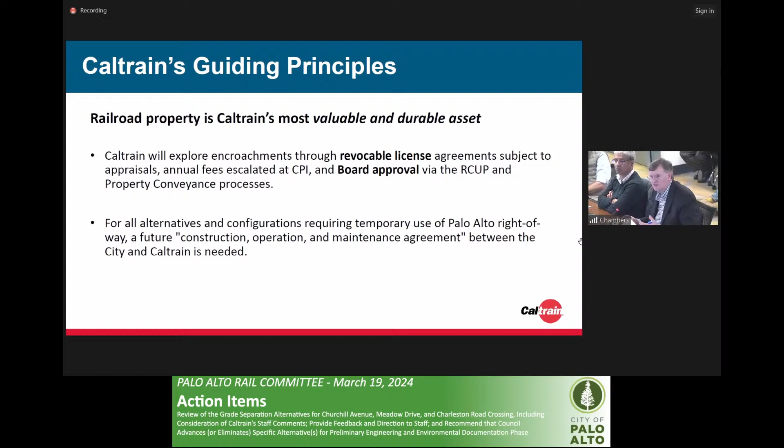And then we also took a look at a smaller item, but we wanted to make sure that we shared it. Today, as we go up and down our alignment to inspect our track, we do that on our own property. Some of these improvements would build a viaduct or a wall at the property line, and we would need to be on Alma Street to do that. And so if we were going to be on Alma Street to do the inspection, we'd need a permit. And so we wanted to at least have the conversation about those elements. Next, please.

And as this gets grade separated, we want to find ways to still accommodate that use of the right-of-way. How do we preserve the utility of that right-of-way in a way that accommodates the community's vision today, but still allows us to use it in the future if we needed it? And so, looking at those solutions in keeping with the board's policy on right-of-way is to make sure you consider the entire width of that right-of-way and how you use it. So next, please.

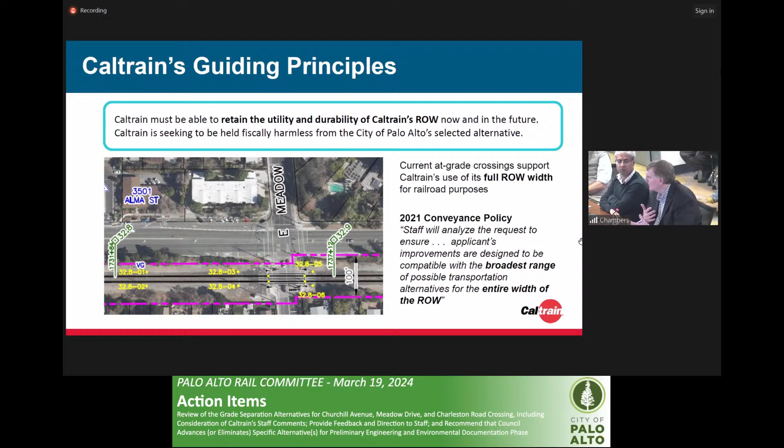So here's a typical cross-section that was in the plans. And we had talked about whether it was 15'6" or 16'6" for those standards. And, you know, we changed that standard in the last round of our criteria. We had 15'6", and then in 2020, we changed it to 16'6". But we walked through that with our operations folks, our safety folks, our engineering folks and with our exec, and said we could live with the 15'6" as it's designed.

Because as you said, Council Member Lauing, if you change that profile of the road, you're going to increase the impact to the neighborhood. We don't want to do that. Can you make 15'6" work? Yes, we can. We would need a sacrificial beam to kind of protect the structure. And so that's been done in other places. Metrolink does that. They allow that with a sacrificial beam and an agreement. If the beam gets hit, the city would pay to get that repaired.

So what's the purple line here? Which line? The purple line. Oh, the purple line, that's the road coming down and back up. Okay. And so that's just a cross section that shows the road going down and back up underneath the grade crossing. I didn't know if it was a measurement or actually the road, so thanks. So you see the little dash box, that's providing that width clearance for the full width of the right of way from a standard that's been there for a long time.

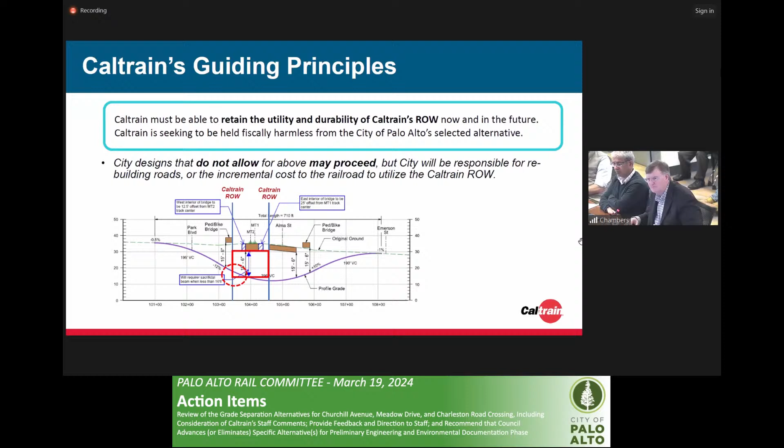So would you even need the option to, quote, raise the road? Wouldn't it be much more... Well, likely no, that would be for the train. The notion was, it wouldn't be up to us to make the decision.

If you wanted to rebuild the road, you could. Got it. If you wanted to raise the railroad, you could. If you wanted to raise our railroad today, you could. But just knowing that we need that clearance to full width, and how do we accommodate that? And it's really a PE level of analysis, but we wanted to be clear that we could make 15'6" work. But if it wasn't the full width, we'd need to have some level of agreement.

Does that make sense? Yep, and you probably have a long notice period from the time at which you need it. Yeah. It takes a long time to build anything, particularly a railroad. I do have one additional question there, if I may, and I know there's a balance between getting through the presentation and getting questions answered maybe at the end. So I'm going to ask this. If it's simple, we can answer it now. Otherwise, keep going.

It's feeling obvious to me, which means I don't fully understand it. Like, why wouldn't we just build the road right in the first place? Something about the slope required. If we do that extra 2 feet at the ultimate depth, it's going to create a much longer slope. How much longer is that slope? Roughly. Edgar, I think you did a little bit of math on that. Yeah, it could be, again, it depends. There's variables that could be adjusted, but we expect it to be somewhere between 80 and 150 feet additional. That means additional homes. Yeah. Okay. And so we were trying hard to not do that.

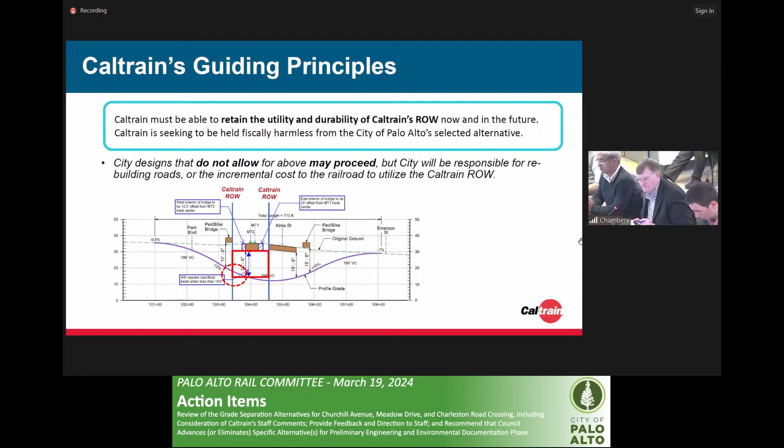I just want to loop back then to the Rengstorff. From what you said, it sounds like it did not include it. And are you going to require that as a change to their design? So I need to look into it a little bit more. My understanding was that was the direction the team was given, but where it occurred in that life cycle, I'm not sure. Okay. Next, please. Next, please.

So we wanted to not bury the lead, so we wanted to provide a quick executive summary at the high level. So if we take a look at the Churchill, there was already a selection of an LPA with 2 backups. And so 2 of those are viable and 1 of them less so. On the locally preferred alternative, the Kellogg undercrossing, there's some minor adjustments to Alma Street. They had about a 5-foot encroachment. We can accommodate about a 3-foot encroachment.

There is the bikeway on the west side that encroached significantly into the Caltrain right of way. That's the narrow side of the tracks, and we could not accommodate that. So the pathway on the west side needs to stay within the 25 feet that's available today, or move farther to the west, or potentially relocate to another location. And I think staff is wondering about that question. Philip? Yeah, so if you're referring to Kellogg versus Seale, we are planning to bring a report on that at the next rail committee meeting next month.

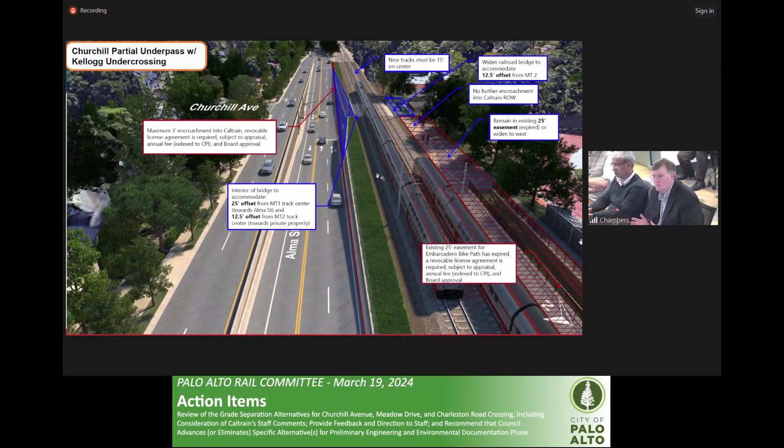And then the last note there is that a maximum encroachment of 3 feet appears to be viable. So taking a look at where the tracks are and where the OCS poles are along Alma Street, it looks like we could accommodate a 3-foot encroachment and still make that work. It did show a 5-foot encroachment, but we think we can make 3-foot work. So next, please.

So this is taking a look at the undercrossing at Churchill. Starting at the top, working my way around counterclockwise, there's a note about making sure we stay within the existing 25-foot easement for the Embarcadero path. Then it talks about the 15'6" vertical clearance. That's what we used to have. We want to go to 16'6", but we realize here that would create more impact to the community. We could accommodate the 15'6" with a sacrificial beam and an agreement.

The other thing that was shown at this location was pushing into the Caltrain right of way to accommodate vehicle turning movements. On this side of the right of way, we could only accommodate 3 feet, and it was showing an extensive encroachment that we couldn't accommodate. So we looked for how else we can solve that. We lost the...

Sorry, she's pulling up the PowerPoint rather than that, because you have some animations in the next slides. Thank you. Oh, okay.

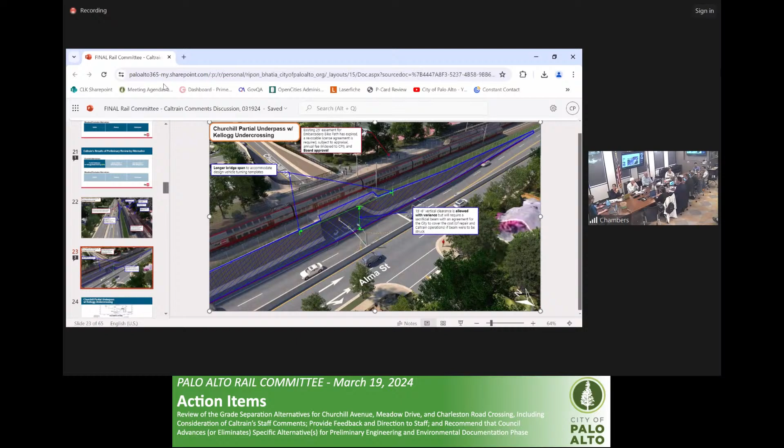So we were looking for a way to help solve that. And so we looked at, can we make the opening longer? Can we make the bridge longer and accommodate those turning movements? And we worked with AECOM, Palo Alto's design consultant, that said if you made the bridge longer, that would accommodate those turning movements, and then we wouldn't encroach into your right of way that you can't accommodate. So that was kind of the creative engineering solution.

How can we make sure we don't impact property owners by going more than 15'6", and how can we make sure we don't encroach more into Caltrain's right of way where it can't accommodate it and still allow the turning movements that are necessary for emergency vehicles and others on the road network? So this was a creative solution for that.

I have a question on a couple places. It notes that the bike path encroachment or this prospective encroachment for the eastbound right turn from Churchill is subject to appraisal and annual fee. Does the city currently pay for the bike path encroachment and for the encroachment that we currently have of southbound Alma onto Churchill?

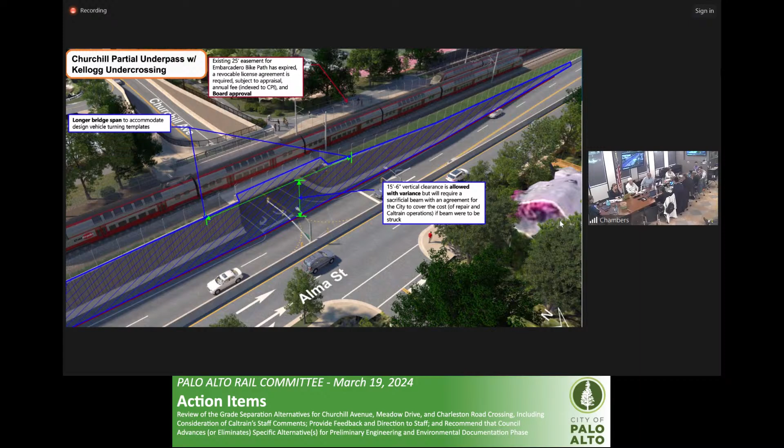And so I believe the encroachment for the Embarcadero, that agreement has expired. So Embarcadero? The Embarcadero bikeway. Oh, the bikeway you're talking about, that has expired. No, but my question is, before it expired, were we paying for that encroachment? Go ahead. Yeah, go ahead. So no, historically, we have not.

Right. Oh, thank you all. Thank you all. I think when you push it, it would go on, but it doesn't always do that.

So no, historically, we have not paid for it. However, as we've been engaged in conversations with Caltrain, we have received the request to pay. And we have not paid for the Alma right turn encroachment either or elsewhere. So as we at Caltrain have said, we now have a commitment to a corridor-wide strategy and a partnership with the cities. The partnership means that we'll start charging cities for the encroachments when we didn't do so when we didn't have a partnership. I don't know if we want the partnership.

So what staff is trying to communicate is the board established a policy, and the policy said that for uses of the right of way that are semi-permanent, the board directed staff to get an appraisal and go to the board to have a fee schedule. But the board has the ability to say that for this particular use, they get to establish whether there's a price or not. What staff is communicating is, here's the board policy that was established and here's what it says, but it's a board level decision.

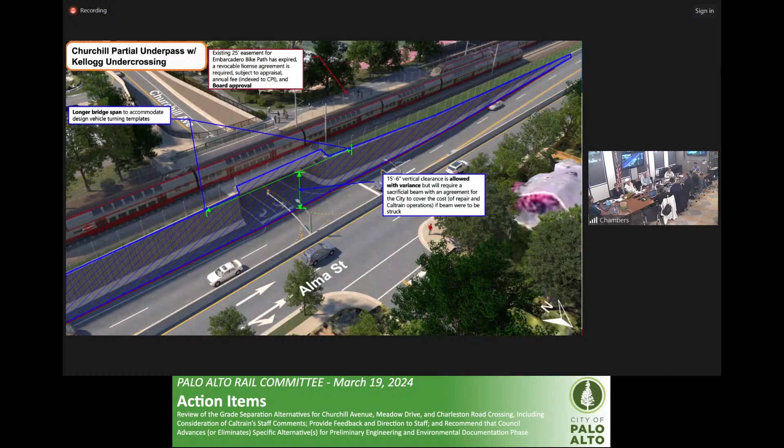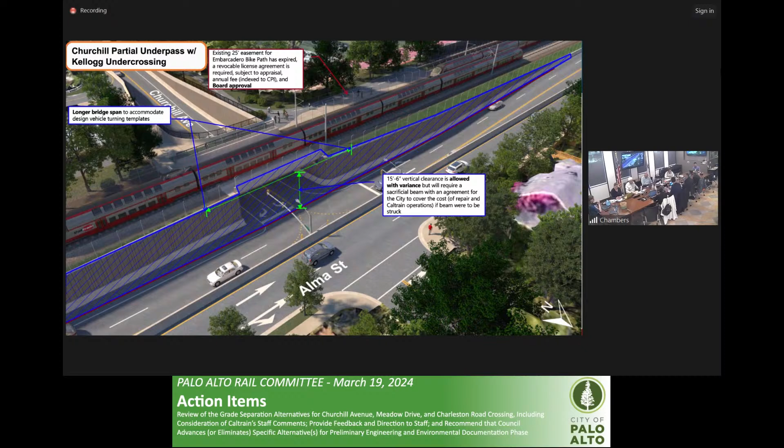But the intent of this slide here was to say that originally there was a solution that didn't meet the needs of the railroad. We wanted to make sure that we could provide that creative engineering solution. Well, we will move the wall over here. We'll make the bridge a little longer. We'll do some sacrificial beams. We won't change this. How can we find that art of the possible that still keeps the intent of the design, but accommodates the needs of both to the minimum extent possible? Next, please.

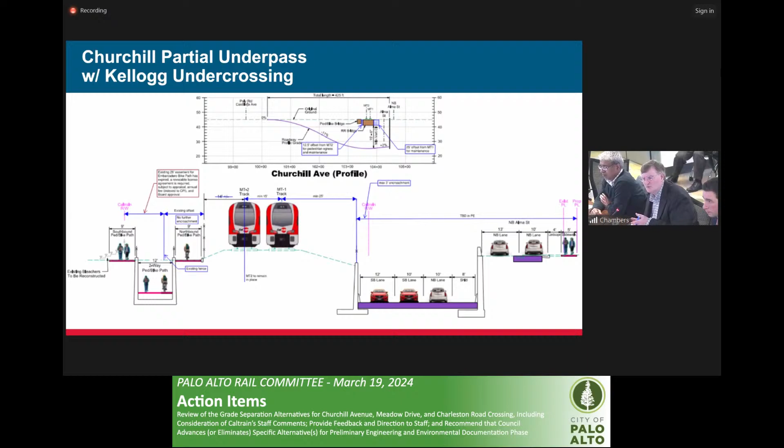So this is just the cross section, shows the same sort of information. The cross section at the top shows the 12.5 feet on the one side, which is the 7.5 foot clearance envelope for the train and a 5 foot for emergency egress. And then the 25 foot on the other side, which is accommodating the OCS poles and the 10 feet.

The section on the bottom shows that 3 foot encroachment into the right of way. Originally it was 5 feet, so we said we can accommodate 3. Looks like that might be able to work with that cross section that's there, still makes that viable. And then on the left side, that blue line is the existing fence line, and those trains are actually a lot closer than was illustrated, and we really can't accommodate any further encroachment there from where the OCS poles and the train are at. That's a pretty tight side of the right of way.

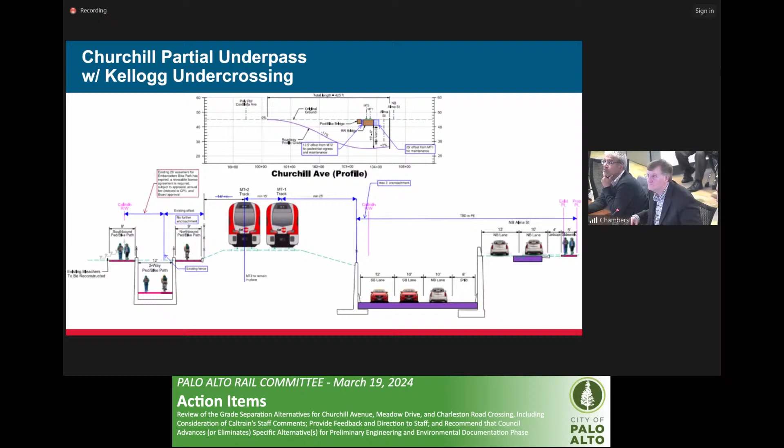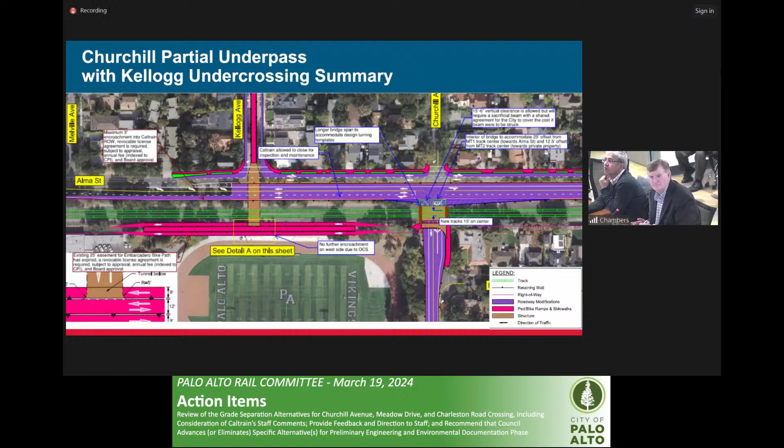Next, please. And this is just a plan view showing the same thing, if that's easier to understand. It has the same notes, just in a plan level view. Next, please. The closure option with mitigation.

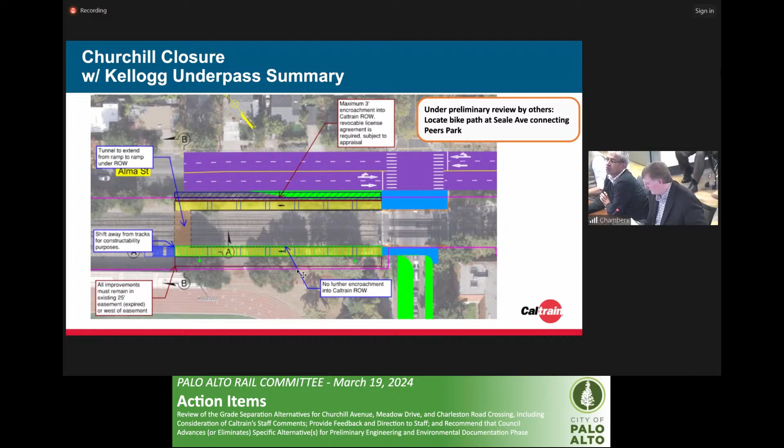Moving to the west side, the bottom part of the plan view, because of the location of the track and the OCS, we could not accommodate any additional encroachment. But we did suggest if you're going to put a ramp at this side, you'd flip its location and make it more to the bottom part of the page to get it away from the OCS poles to make it more constructible. And of course, would have the tunnel be the full width of the right of way, similar to what was done for the Middle Avenue undercrossing in Menlo Park. But this one was a little less viable because of that east side pathway.

The next one was the closure option with mitigations, and Caltrain had no comments on that. It appeared to be viable just as it was shown. Sorry, I'm new. What is the difference between option one and option two? You want to do it? So the Churchill, it's the crossing along Churchill, underneath both Alma and the railroad tracks. So it's perpendicular to the railroad tracks in the middle of Churchill Avenue. So it would close Churchill. It's right in, right out.

And sorry, just to note that closure option 2 with mitigations was the one that was preferred as the backup option among closures. So it's the backup option to the partial underpass. But the closure option 2 with mitigations was the preferred backup option. Yeah, and you're right. It's a closure option with right in, right out on each leg only. Correct.

And moving south to Meadow Charleston, starting with the hybrid. Again, starting with the top and working around clockwise. There's a right-of-way jog at Meadow, and so that's material to where you place the tracks. So the first note there is the tracks be aligned as far west as possible at the very southern portion because of that jog. We'll have more slides on that a little later, but that's kind of where you started. Where do you put the tracks? Let's start there first.

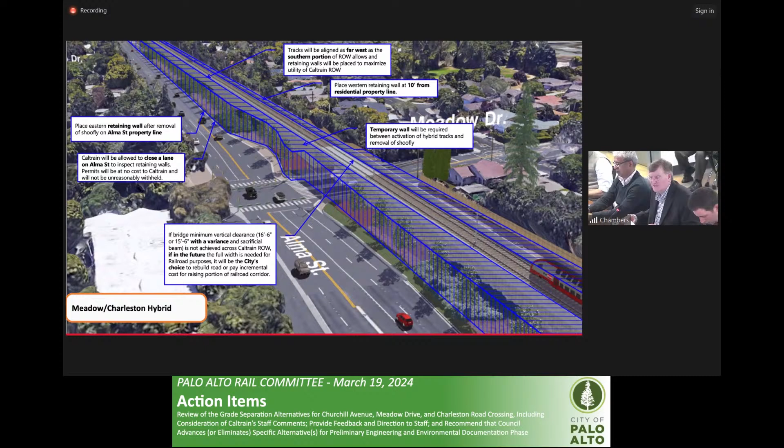The next note has to do with the temporary wall, and we'll explain that a little bit more with the cross section. And then we talked about that 16'6" versus 15'6" before, and so that's just the same note. And then we talked a little bit about the retaining wall on the other side would be at the Alma Street property line, and there might be an opportunity when we need to inspect that, and we'd have to get a permit from the city, and we'd look for that permit at no cost like we do at other jurisdictions. Next, please.

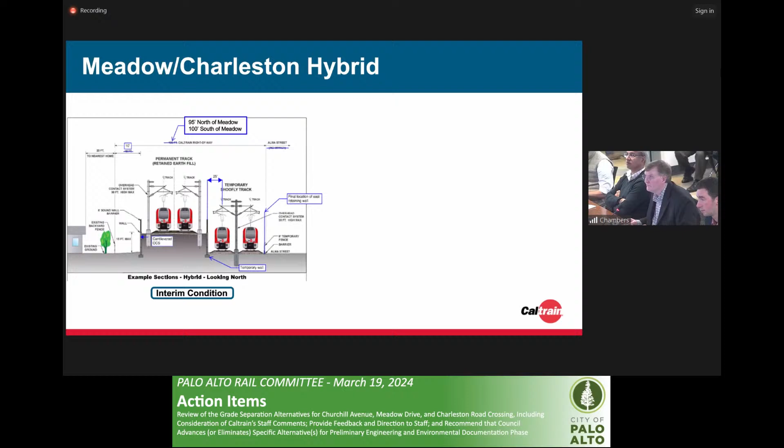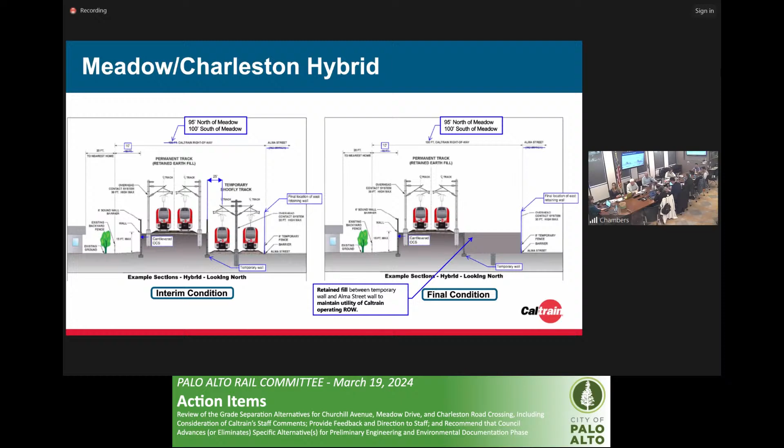So this is a cross section, and it's important to understand that the shoofly that is shown here actually ends up being in Alma Street travel lanes during construction when you do the math. So we wanted to help illustrate that. Next, please. There we go. And then in the final condition, when you've got the west retaining wall 10 feet from the property line, then you've got the permanent track for the hybrid, and then you've got the eastern wall at the Alma Street right of way. Then you fill in between those so we can continue to inspect our tracks and have full utility.

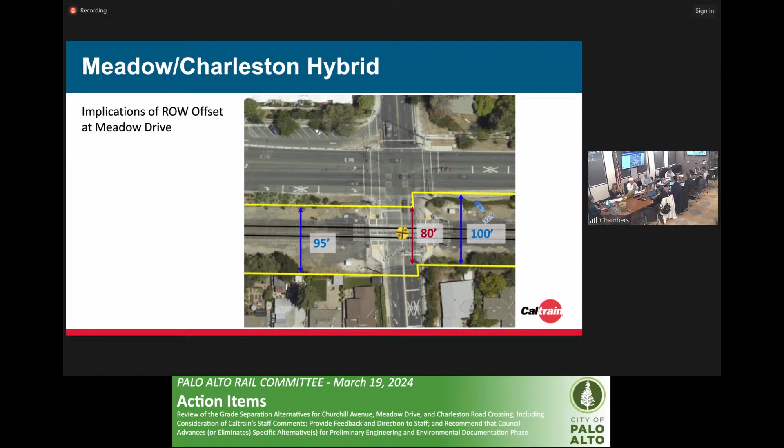Now, you heard me talk about that offset at Meadow, and it has implications. On one side, it's 100 feet wide. On the other side, it's 95 feet wide. So it jogs. On one side, there's a 20-foot jog, and the other side, a 15-foot jog. And so that's material in terms of how you lay out the track and the implications of that. So we have a little bit of a slide deck for that. Next. So this is a plan view looking at existing conditions. You can see main track 1 and main track 2 there today. Next, please.

So you want to build your shoofly along Alma Street. Now this shows a 25-foot clearance between the centers of track. It's important to understand the service disconnects. It's like if you're going to do a remodel in your kitchen, you turn off the circuit breaker, so when you're working on your appliances in your kitchen, you're safe. So the service disconnects for this section of track occur at Menlo Park Station and San Antonio Station. They're 4.1 miles apart. So when you go to flip the circuit breaker to shut this section down, you shut down 4.1 miles. And so you want to make sure when you do that construction, you do it efficiently. So this shows a 25-foot offset that allows the trains to keep running, because it shuts down those busy stations that we talked about earlier.

And know that between the last southbound train past San Antonio and the first northbound train that comes into San Antonio, when you do the math of where we are today, during the weekdays, it gives you about 3 hours and 39 minutes. But it takes a half hour to shut down the system and a half hour to turn it back on. So you only have about a 2 hour and 39-minute window to do work. Now on the weekends, you've got about 5.5 hours. And so if you're closer to that electrified line, you can't work all the time.

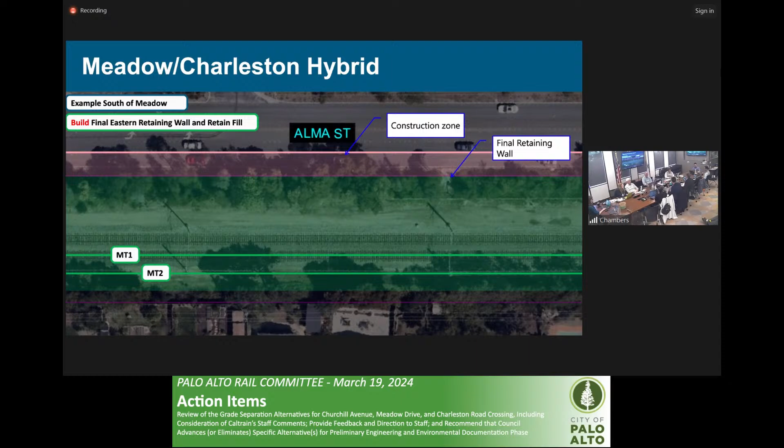Next, please. Now you're preparing to do the last phase, which is to fill in between the retaining wall at the property line and the other structure. Next. And then you fill that in, and then the last slide. And then you've got one more. And there's the final condition. So that kind of walks through it, but yes.

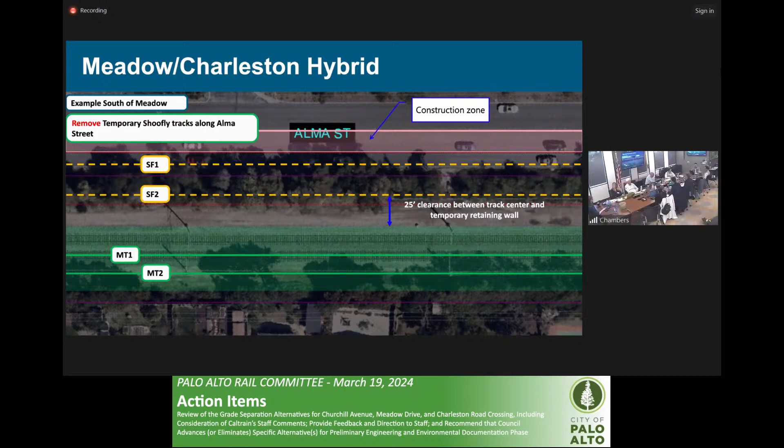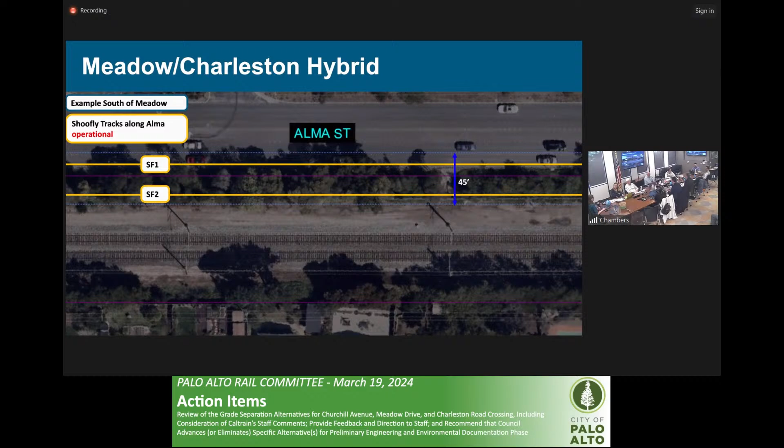I just wanted to make sure everyone understood that main track 1 and 2 moved closer. Yes. And I don't know if you can go back to where that happened so that they can understand that, because I think that's very important for the public to get. Go back one more. Keep going. One more. Keep going. So if you see, there's MT1 and 2, and then if you cycle through, you'll see that they've moved. You see where the existing tracks are in the aerial and where the new tracks are overlaid to that.

Have you said why that's necessary? Edgar, can you explain why that's necessary? Yes, it deals with the jog in the right of way that Rob had shown in an earlier slide. As the jog occurs, having the tracks as far west as possible allows for two things. One, the constructability on the south side of Meadow. And second, on the north side of Meadow is the beginning of the 4-track segment as part of the adopted service vision moderate growth. And so it allows for the future implementation of 4 tracks.

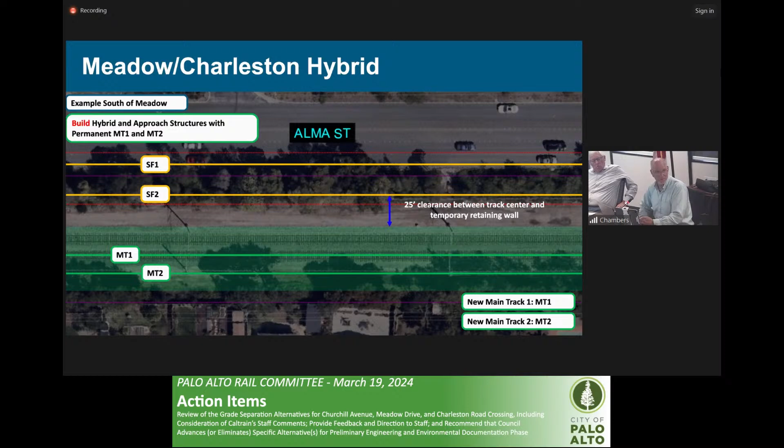And at its full height, the height of the berm is what? Do we recall? I believe in the concepts from the city, it was 15 feet max. So I just want to make sure everybody realizes when we have talked about the hybrid option going back several years, it was often described as, well, the tracks go up a little and the underpass goes down a little. And for those of us who, I had a company 200 yards from San Carlos tracks, the hybrid doesn't feel like a hybrid. It feels like a fully elevated berm. And now that berm is going to be a 15-foot earthen wall, just a few feet from the back fences of all those homes. So I just want to make sure everybody understands the implications of this change.

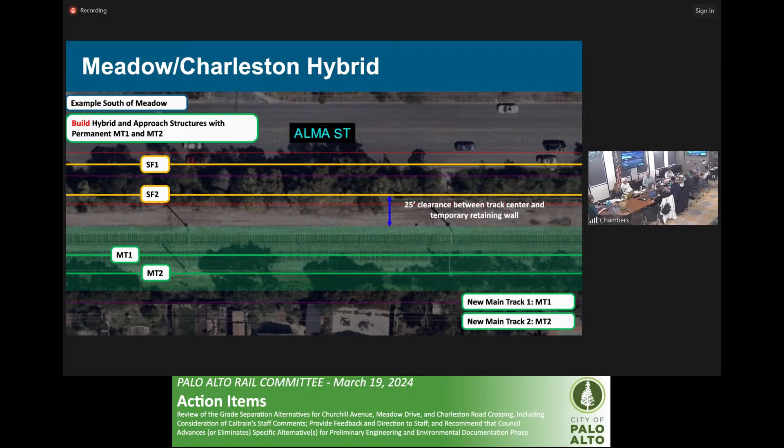Note in this picture, to the west side of the tracks, looks like we have a picture from 70 years ago when we used to have fields there, not homes. So I would just suggest that we get something that gives people a more realistic sense of what it will be. Appreciate that. And I'll also note that with this rendering, you don't get any sense of the elevation of the tracks. No, this was just trying to illustrate. I get it, but people are going to look at it and perceive certain things.

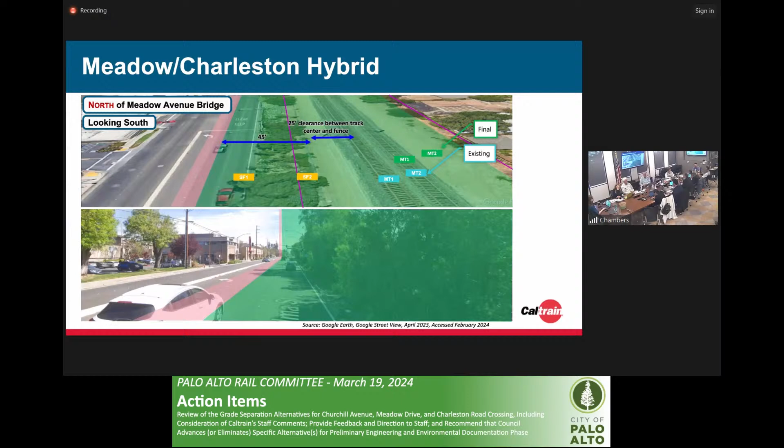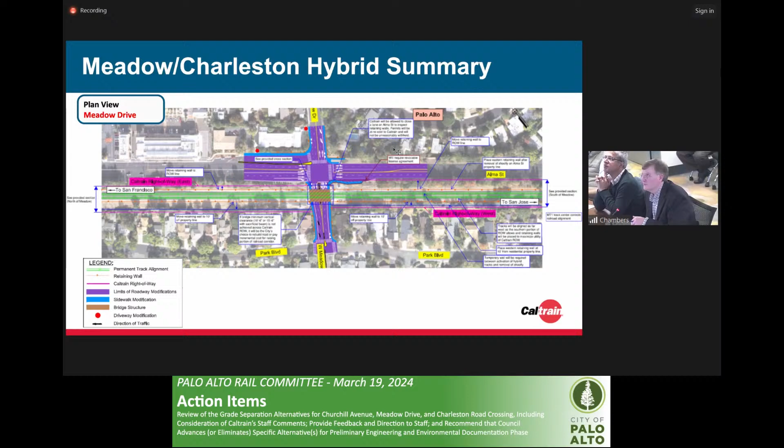And the wires are 22 feet above the track. Yeah. Next, please. So this is just a plan view that has many of the same comments that we've already gone through, but for those that think better in a plan view, we provided those. It has the same sort of things about where the walls are at, those sorts of things, the track alignment, bridge clearances. So next, please. And with Charleston Road, it has the same sort of comments we've gone over before, but just in a plan view.

Next, please. Moving on to the viaduct. Now, with the viaduct, it's important to note that the intent, at least as I understand it, was the viaduct endeavored to utilize the existing Caltrain tracks as a shoofly to save time and money. You don't need to build a shoofly, use the existing tracks. You get right on to building the viaduct. Could be built faster, less impact during construction. But as you've heard me say, the details matter. And so we did a little bit of a deeper dive, which revealed that the viaduct may have a permanent encroachment into Alma Street based on the sequencing plan.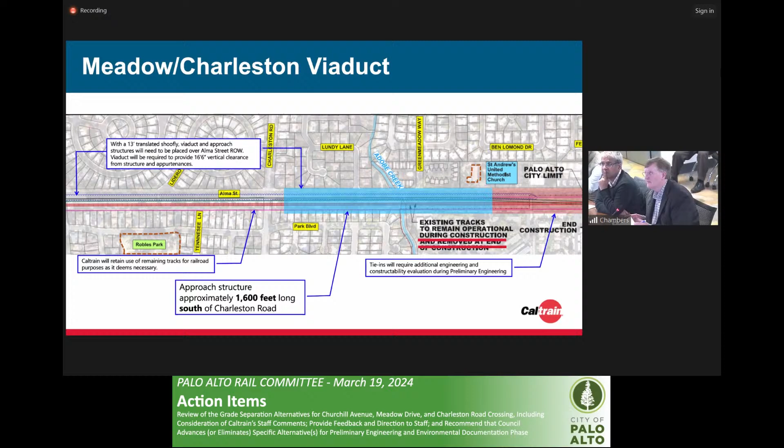But in PE, if this is advanced, we could take a look at other creative ways to build the shoe fly that might not have a permanent impact in Alma. So I just wanted to lay that out there as here's what we saw, here's the implications, but that's not the end of the conversation. That's the start of creative thinking. Next, please. So this is the same as you saw before. This is the existing conditions that we see today. And you see main track 1, main track 2. Next, please.

So there's about 49.5 feet from MT1 to the property line at Alma. Next, please. So again, that 25-foot offset that we talked about, remember those 2 hours and 39 minutes of actual work window if you're not about 25 feet away, or 5.5 hours on a weekend. So let's get away from it so we can work full time. Next, please. So the viaduct is about 52 feet wide from out to out. That gives you the room for track centers, from track to pole, from pole to track is about 26 feet. Then you've got 7.5 feet on either side for the train clearance, and then the 5 foot for the emergency egress. You add all those up, it's about 51 feet, and then a half a foot for the structure to get to the 52. So that's the width of the structure.

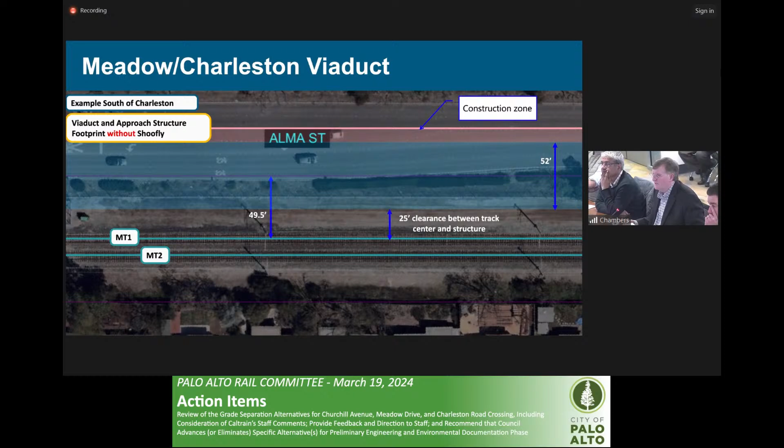So you can see, next please. You can see that really gets pretty into Alma Street, and that's that approach structure that is 1,600 feet long and 2,000 feet long. Those structures are in there forever. So we went, that's probably not what the city intended. So let's look for a creative solution. So the first solution we looked at was, next please. What if we said, okay, here's what's there today. What if we added one track as a shoe fly? So next please. Said, okay, let's build a shoe fly over towards the property owner side temporarily. Next, please. Then decommission MT1. And now you've got that whole thing shifted about 13 feet to the west.

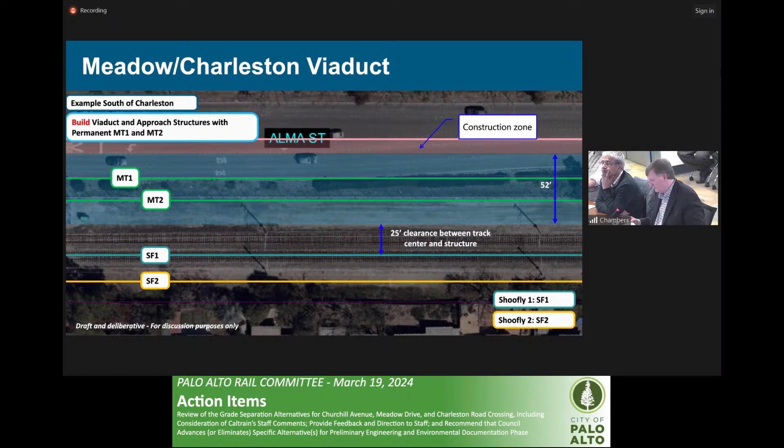And so now you're building the viaduct, but you're no longer as impactful into the street. So next, please. And so that's the final condition. So you've heard me talk about impact to Alma Street. So what does that mean?

So without a shoe fly, you're about, remember the right-of-way shifts in Meadow Street. So if you look to the south of Meadow, we've got a 100-foot right-of-way. You're about 27.5 feet into the Alma Street right-of-way. Now that location has about an 8-foot shoulder, so you're about 19.5 feet into the travel lanes.

Now north, the right-of-way shifts, but you still have that same impact because the road doesn't shift. The right-of-way line shifts, but Alma Street keeps on going. So you still have about 19.5 feet of travel lanes. Now, if you do the shoe fly, let's get a little better. Let's get in a shoe fly. With that, the impact is about 6.5 feet into that travel lane.

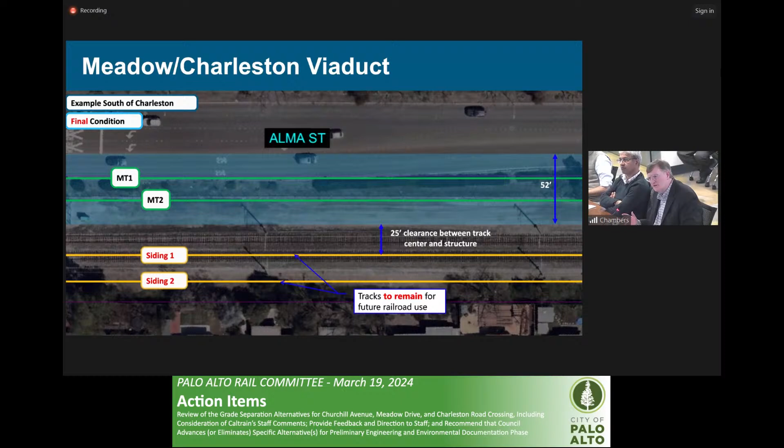Now, during preliminary engineering and final design, could you find ways to make that not 6.5 feet, but make it not impact Alma Street travel lanes? But it would still be in Alma Street right of way. Unless you flipped it on its head and said, let's do the shoe fly out in Alma, like we're doing the hybrid, and build a viaduct over the property. But that's one we weren't charged to look at.

But when we did the analysis here, I don't think folks understood that until we did the homework. So we thought that might be material to decision making to understand. We tried to be creative with what we saw, but it's still a pretty good impact. But it's not the end of the story. It's the part of creative problem solving. But we wanted to highlight that.

So you're saying that the flip that you just said, hey, wait a minute, there may be a problem with what was proposed, but we could flip it, create a shoe fly on Alma. It's the same type of shoe fly as exists with the hybrid. Yes. Okay. And we haven't analyzed that. That's just me thinking out loud, and it would require a lot of help from a lot of engineers and others. But taking a look at what we saw today, we thought it was important to communicate what we found. And it would be material to decision making.

If the decision was to move forward with the viaduct, it was predicated on not building a shoe fly. But the results of that are impactful. So to minimize and avoid those impacts, you might have to build a shoe fly. But those are choices. Questions? Does that make sense?

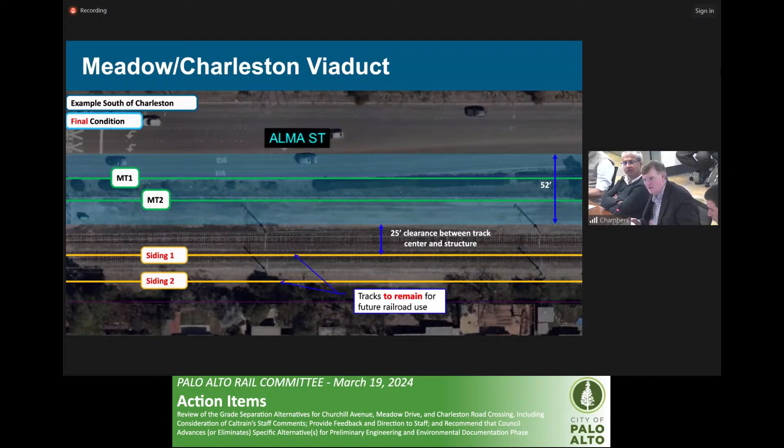So this is just that same illustration where all the buildings look flat. But it does show shoe fly 1 is an existing track, and shoe fly 2 we'd build, and the 25-foot clearance and the new MT1 and MT2. You can see that approach structure, even with shifting, is still in Alma Street travel lanes a good amount. And that's even with trying to be creative with adding a shoe fly.

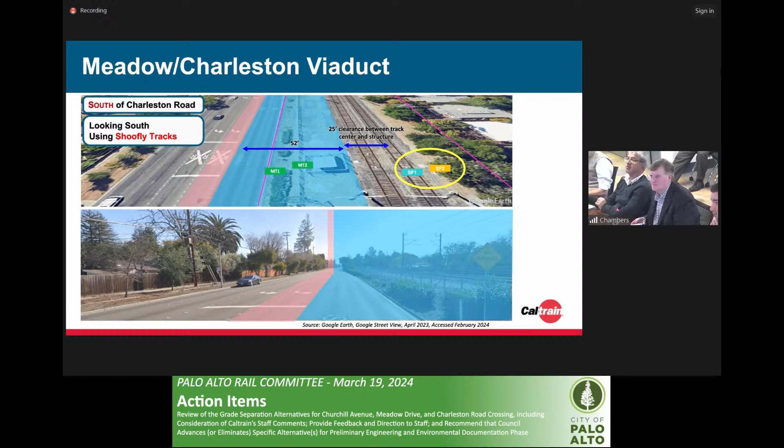Next, please. And these are the dimensions you heard me talk about, the 47.5 feet, the 1,600 feet and the 2,000 feet. Realizing that the structure type that's there for the viaduct would need refinement during preliminary engineering and final design. Do you put the OCS poles in the middle? Do you put them to one side? There's a lot of engineering yet to go with that. Next, please.

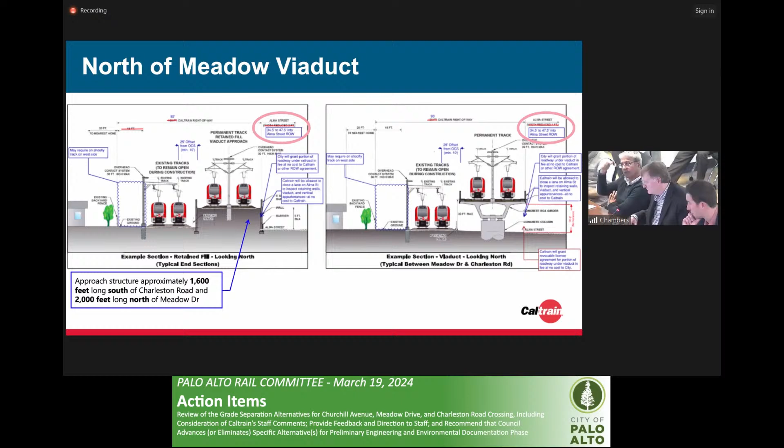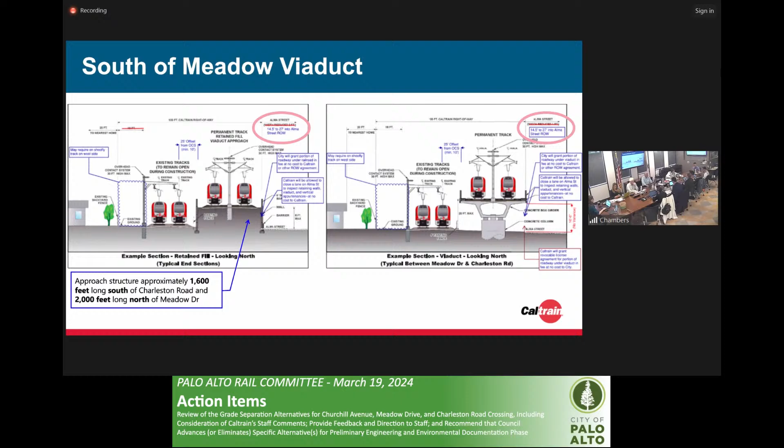Yeah, just the north and south views. Next, please. So now we're moving on to just the illustrated view of that, and that just says that the viaduct would be over and on Alma Street.

And of course, the feedback I got back from our exec is that if we did build those shoe flies on the Caltrain right of way, that's a heavy investment of public funds, and we'd want to retain those for future railroad purposes. If you're going to spend millions of dollars building electrified tracks, they have utility. We'd use them as a siding, as we use the viaduct.

So she wanted to be clear that if we were going to build it that way, we'd want to keep them. And I know it wouldn't be for everyday traffic, but we have needs for putting things on electrified sidings in order to stage and do maintenance and other things. We wouldn't want to lose that investment the public put in. Next, please.

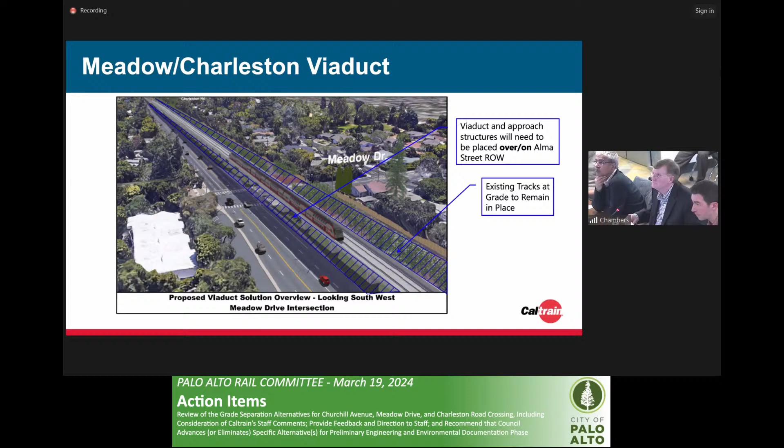Underpass. On to the last one. Let me just make sure I understand that last point. Going with the viaduct situation you studied, the existing tracks would be the shoofly. Yep. To save time and money. Viaduct comes out and then they become this siding track. Yes. Which means like a permanent, not a shoofly.

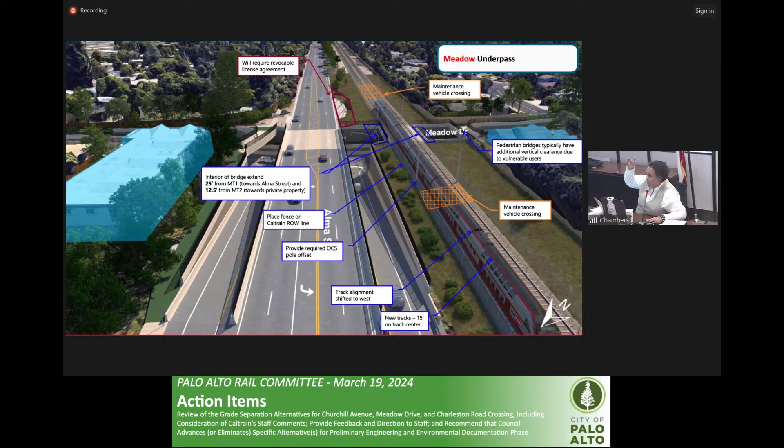The existing tracks go from existing to shoofly to permanent for other use. Yeah. Okay. But if you do that flip thing you talked about, there isn't that. The viaduct ends up on top of the Caltrain, in the Caltrain right of way as we currently think of it. Yes. Okay.

Again, looking at the illustrative, working from the top right, going clockwise, you heard me talk about the access. The access for this location, they're about 1.8 miles apart. So because of the way this is constructed, you get access about a mile north of Meadow and about a half a mile south of Charleston. And so in order to maintain access, we wanted to provide those

12.5 feet on the private property side for emergency egress, because we don't want to impact the road profile and have additional property impacts. And we need access on the Alma Street side in order to take emergency vehicles, maintenance vehicles up and down that 1.8 miles. But we don't need it on both sides. So we put a maintenance vehicle crossover.

That's an asphalt crossover, right? Between the tracks, you put asphalt, you drive across it. That way you don't need a wider bridge on both sides, but only on one side. And then on the side that's away from the residences. So you're driving those maintenance vehicles on the other side away from the residences. So this just says provide those maintenance crossovers.

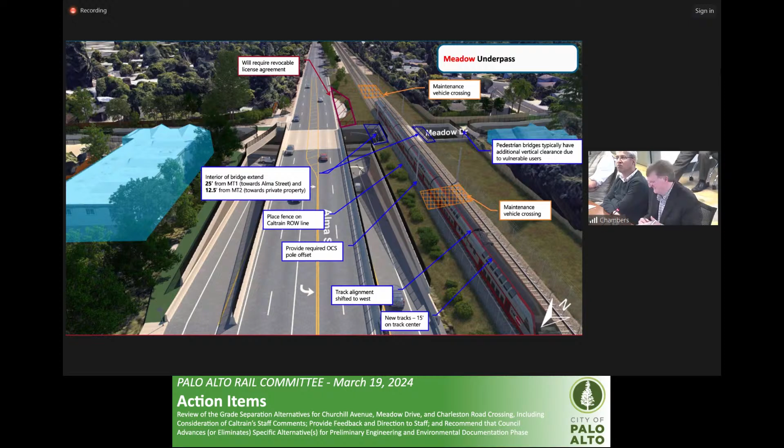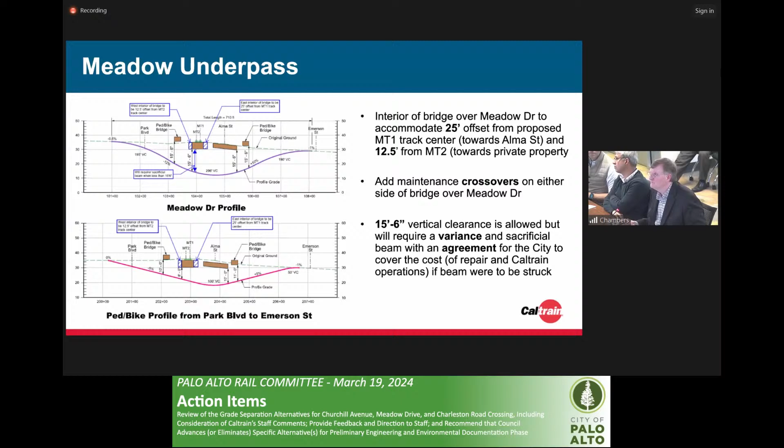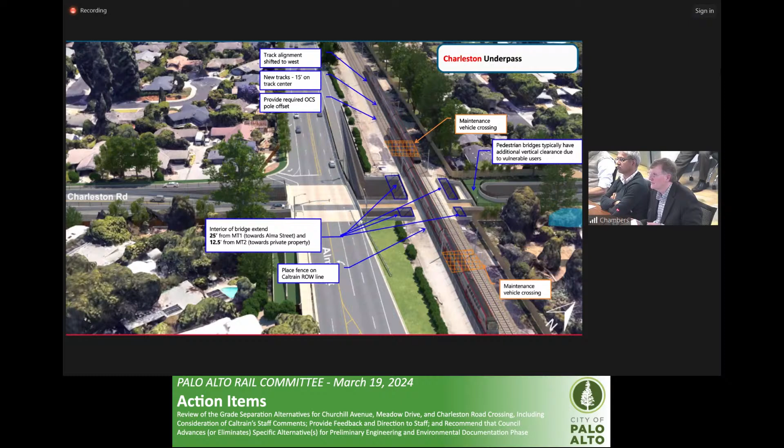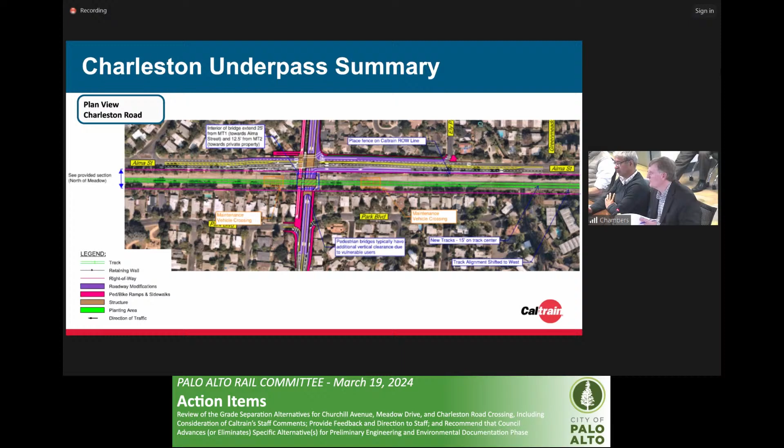And that's the presentation. Next steps. And back to staff. A question on the bus pullout. We don't currently have a bus line that travels there, I don't think. We do? Oh, yeah. Which one? There's a stop along Alma. We didn't notice it when we did XCAP. We caught it later. And so with staff, we talked about the potential of having to figure out where that might move to. Okay. Obviously have to be a negotiation with VTA.

And right now, how does the bus pull out? The bus literally pulls over a little bit on Alma. People get on and off, and then it just pulls back out. Okay, thanks. It just wasn't clear from the drawings whether that was gonna keep it or remove it. Yeah. No, I just hadn't appreciated that. Thank you.

Sorry, and this is just a landing page for any questions about the next steps, but it's the same slide that presented earlier. So I guess turn it over for discussion or public comments or wherever you'd like to go. So why don't we go ahead and go to public comments right now, and then we can come back with committee questions and comments. Sorry, one moment, please. Yep. All right, our first public speaker is Adrian Brandt.